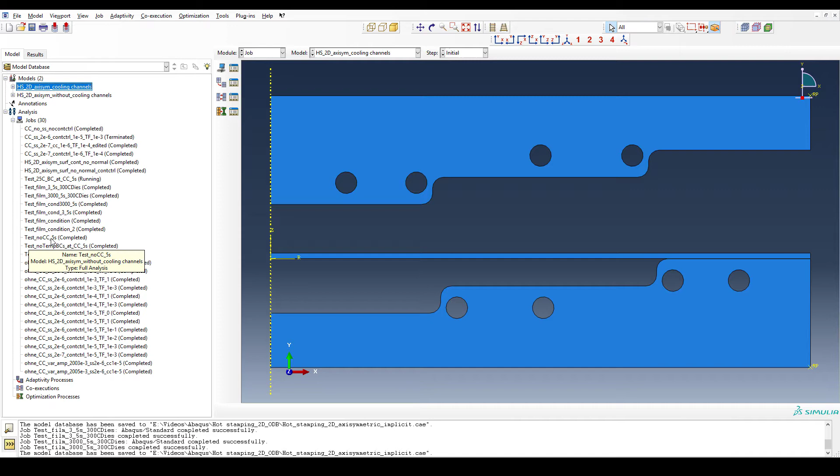So if we look at the results, we will first take a look at the reference simulation without any cooling channels being introduced. We'll check the nodal temperature. I've done some work and changed the path a little bit.

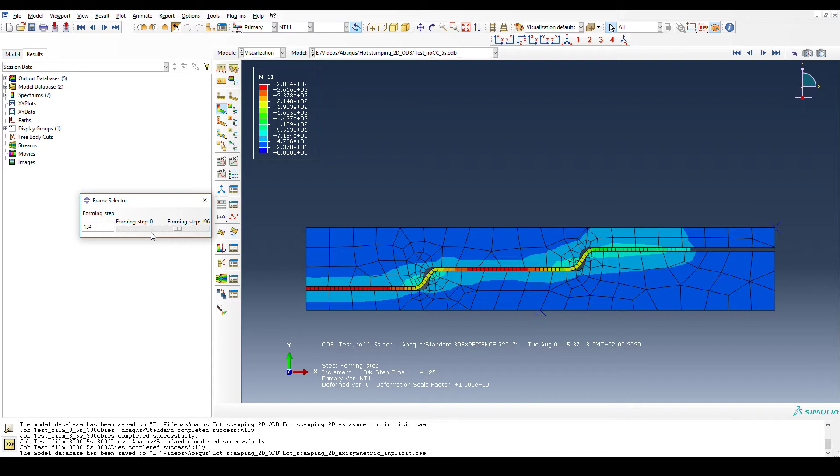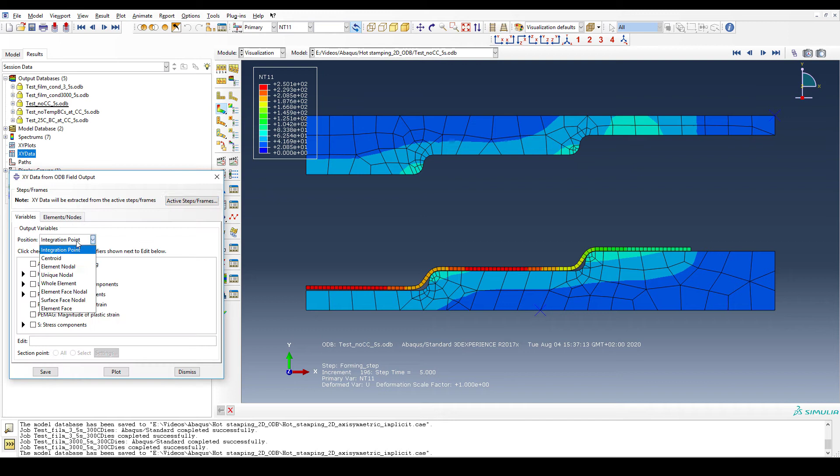So for instance, if we just take the temperature -- okay, so that is the reference temperature distribution. You see the contact phase, so you have the forming phase and then the contact phase, and then again, it's basically what we talked about in the first video, just a little bit extended.

It took Manish and me a couple of hours to understand all the details of it, so we only show you the results, but that's the beauty of finite element simulation. You are presented with a result that you don't understand, and then step by step you check the physics behind it, and then you come up with a conclusion, and that's pretty interesting.

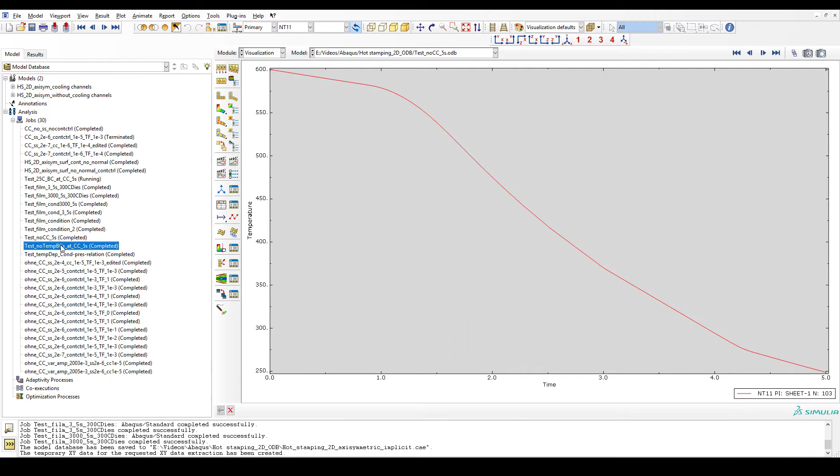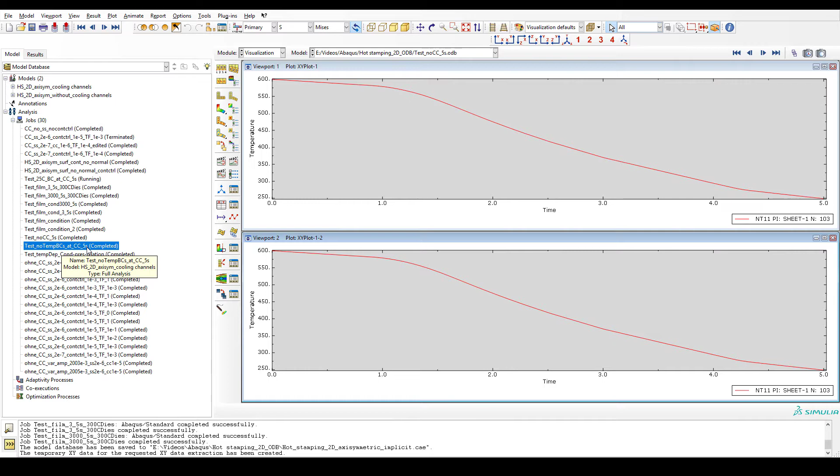I will start with the outcome of our analysis, which is checking what happens if you only introduce the cooling channel and don't do anything else -- you simply drill the holes in there and keep the rest constant. So this is what I want to do with you right now.

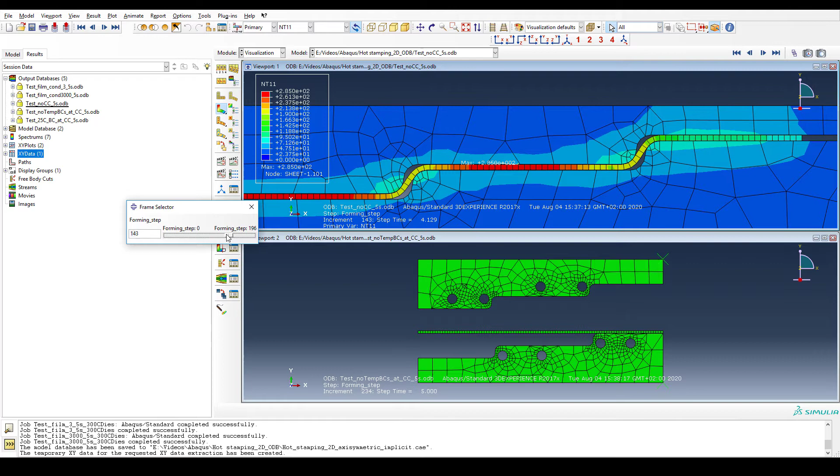First we are interested in the maximum temperature again, and we go to a similar state, which is at the end of the contacting phase, let's say at 4.1 seconds. We do the same with the cooling channels introduced, so that's roughly the same time span. And then we want to see again the location here.

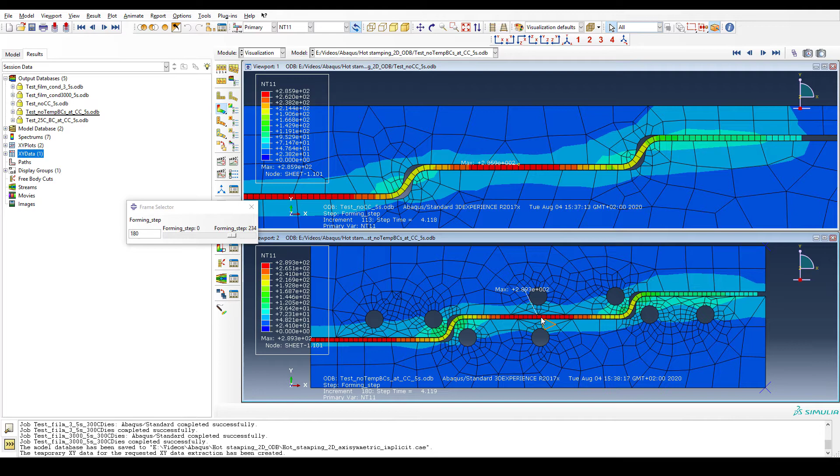What we see is that the temperature with the cooling channels present is higher, at least at the maximum location, and you can also see some differences. Let's give a uniform scale for both simulations, so then it becomes easier to compare the two.

So you can clearly see that the sheet temperature in this case is lower, while the maximum is higher. So there are already some interesting observations just by introducing the cooling channels. You can also see the distribution of the cooling channels affects the temperature between the two, just by the cooling channels being there.

That's, I would say, a first interesting result to observe. And next, you would ask, okay, how do I - and this again is for me probably the most important topic when it comes to being a simulation engineer - you need to think about how to properly define my boundary condition. We said, okay, we run a fluid through here, then you say, okay, I can simply define, let's say, 25 degrees Celsius boundary condition.

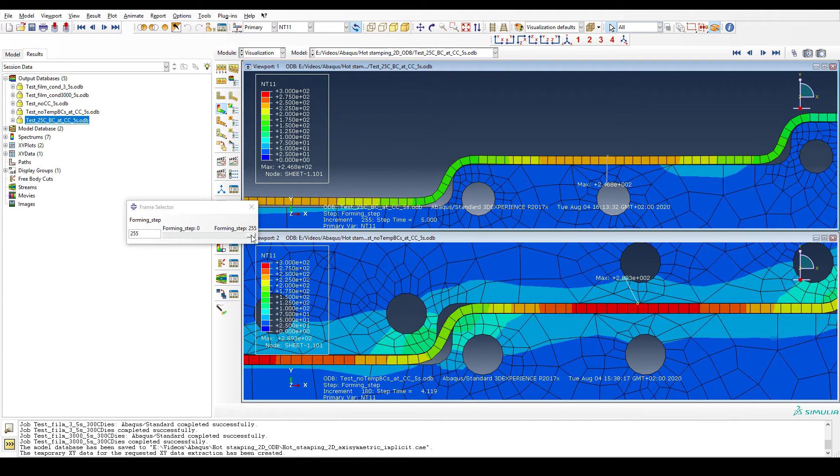at my cooling channels. So this is what we did here. We'll switch to the same time frame roughly. And you can see again that what is quite interesting is that the maximum temperature is altered, it's lower, and also the overall temperature of the sheet is lower, which you would expect since there is cooling defined at the edges.

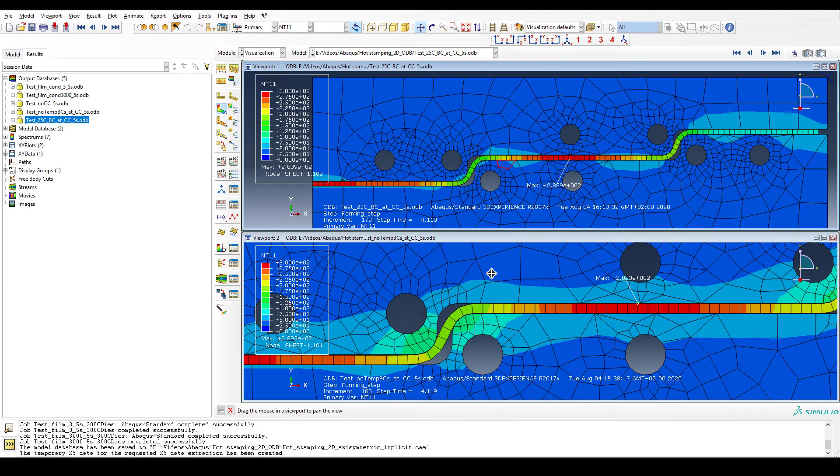However, what is most striking - and here it's technically also correct - is that you see the temperature distribution in the die is very different. Here the heat was more evenly distributed. However, think again: the dies do not dissipate heat to the ambient. So where does the heat go?

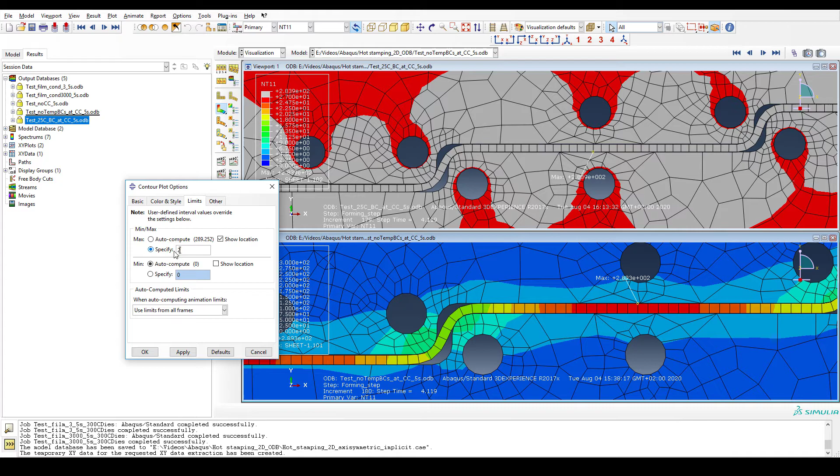Let's give 27 as the maximum temperature for both simulations. Remember, we specified 25 degrees Celsius at the edges. So you can clearly see that defining 25 degrees C, it is maintained because it is a boundary condition that must be fulfilled while solving the thermal equilibrium, or the thermomechanical equilibrium, I should better say. In this case, they heat up to whatever value. However, keep in mind that since no heat is technically lost in the dies - because they don't radiate to the ambient - it is just redistributed.

So think of it: is this the correct way to model the boundary conditions if the heat is not being taken away from the system but only redistributed? Your answer should be no, it isn't.

Because defining a fixed temperature only means that it's like a rigid body - you tell the equations there they have to be 25. Whatever you do in the rest is according to your other boundary conditions. This means the inflow of heat due to conductance with the sheet, and no outflow because there's no radiation to ambient. Again, I'm saying that you alter the distribution, but if you want to take something away from the system, you don't use this - this is without it.

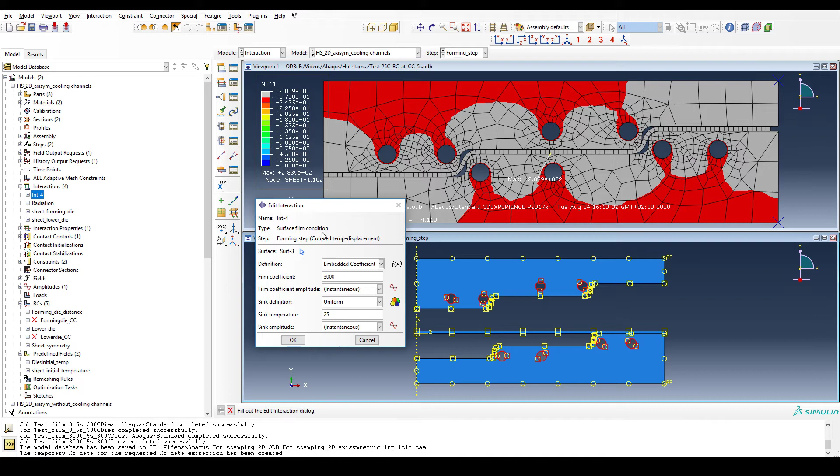Because here you can see I've selected the 8 cooling channels, technically the inner surface of those cooling channels, and I defined a sink temperature. At the surface, you can imagine having an inside and an outside. The inside of the surface is the sink temperature, which is 25 degrees C, but this 25 degrees C is not part of your body. The outside surface is part of your body, but the flow from the outside - which is part of your body - to the inside - which is not part of your body - is defined by the film coefficients, like a conductivity coefficient you can think about.

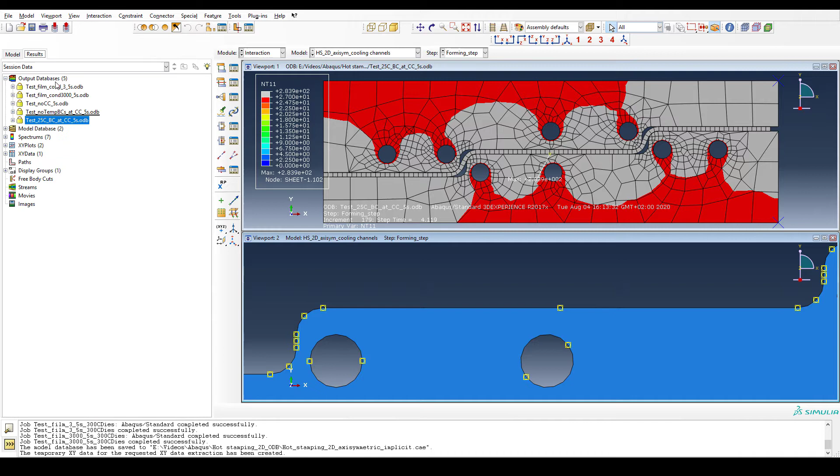And so we ran 2 simulations, one with a realistic value of 3 according to our unit system, and one with an unrealistic value of 3000. I now want to show you the results step by step. So we start with the one that has the realistic film coefficient, which is also lower than - wait a second, I need to go to the same time step.

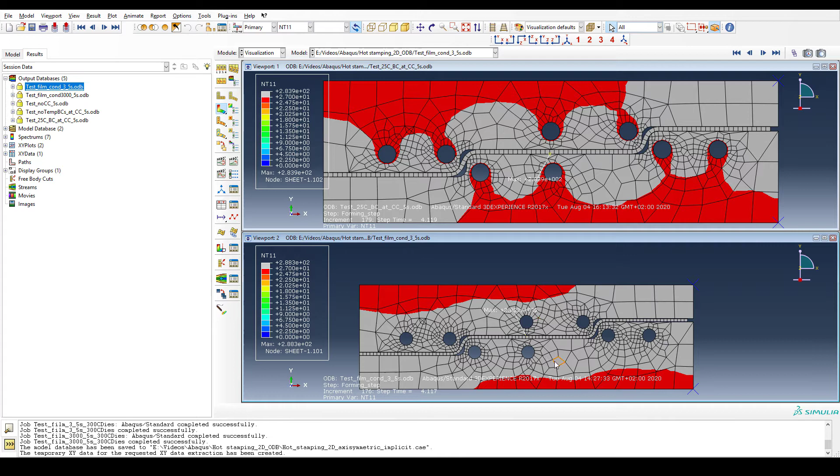Roughly here. And you can see, let's go to that - the temperature distribution looks again more similar to the case where we defined no boundary conditions, rather than the one where we defined the fixed 25 degrees as you see on top. So why is this the case? Why didn't introducing the film condition really affect our results?

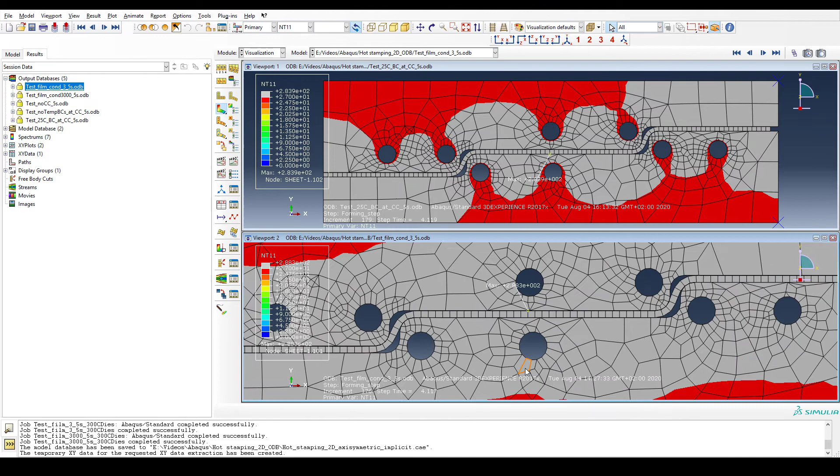For this, we again fall back to our heat flux analysis, which is pretty interesting because it can tell us a lot about what's going on. Here, if we look at, let's say, the cooling channel in the middle, we can observe a phenomenon where a lot of the heat is flowing around. Here at the top, it's partially flowing around and partially flowing into the sink, but a lot of the time, and you can also see this here on the left, the heat is flowing around my cooling channel.

So why is this the case? If we go back and check our model definitions and our film coefficients, our conductivity coefficient was defined to be 3. And our internal conductivity, just from the material, the 22MnB5, we defined as 40.

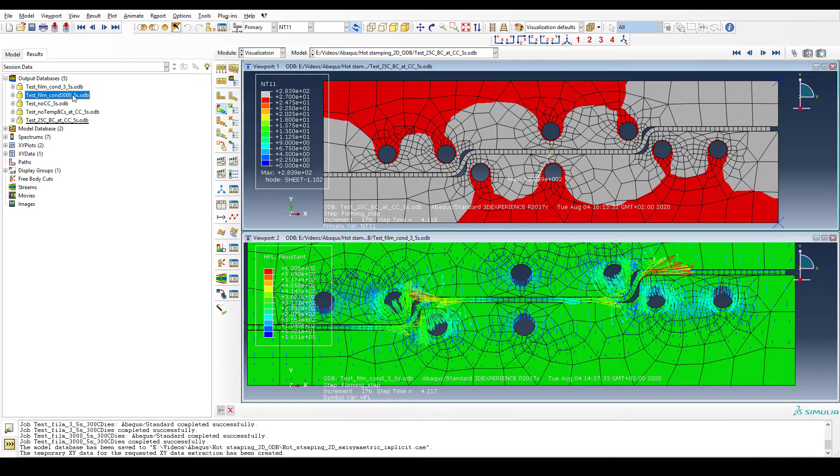Okay, let's compare it with the one where we defined 3000, which is artificially too high, but gets us closer to our actual solution. Let's start with the nodal temperature again, and we see that in this case the result is a mix between our falsely defined 25 degree boundary condition and having no or a low boundary condition.

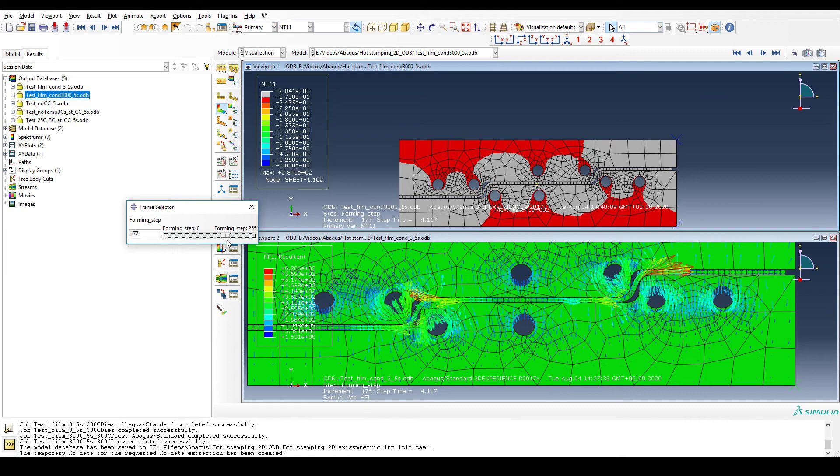Let's go to the right point in time, about here, and take a look at the flux as well. We see now that the flow of heat is actually at the surface. In the best case, it's perpendicular, meaning the majority of the heat flows towards the sink, right?

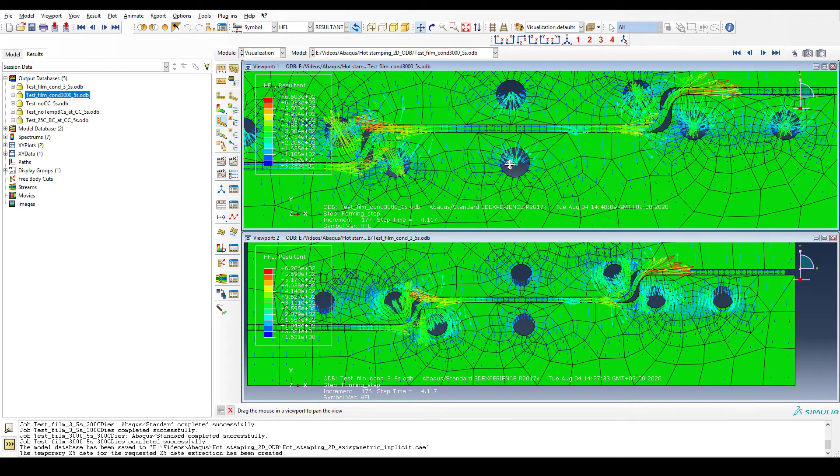With this artificially high film coefficient, it is more likely for the heat to flow into the sink, and the sink is actually taking away energy from the system, unlike the 25 degree boundary condition. Even though they look similar, it's technically something very different.

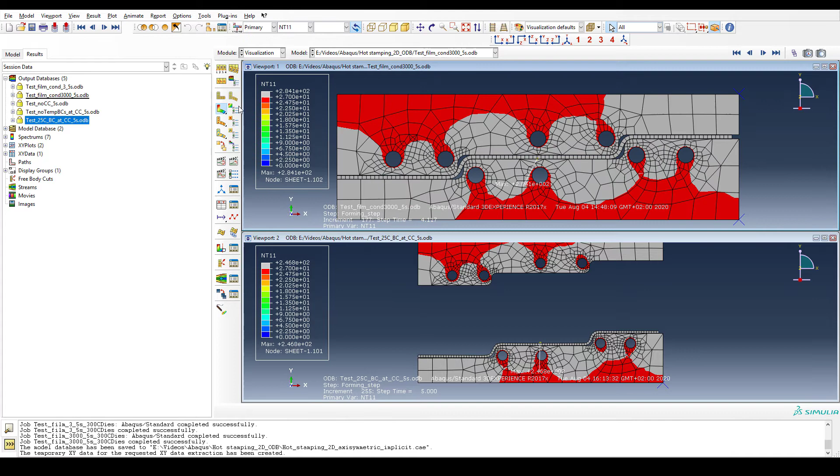So again, I want to compare the falsely defined boundary conditions with the one where we did it artificially wrong. Both cases I would consider incorrect, but they yield similar results. That's interesting.

However, in the lower case, where we defined the boundary conditions without considering the outflow of energy to the cooling channels, we forced the overall energy within the dies to follow a certain path—not the one that gets close to the cooling channels, but rather around it.

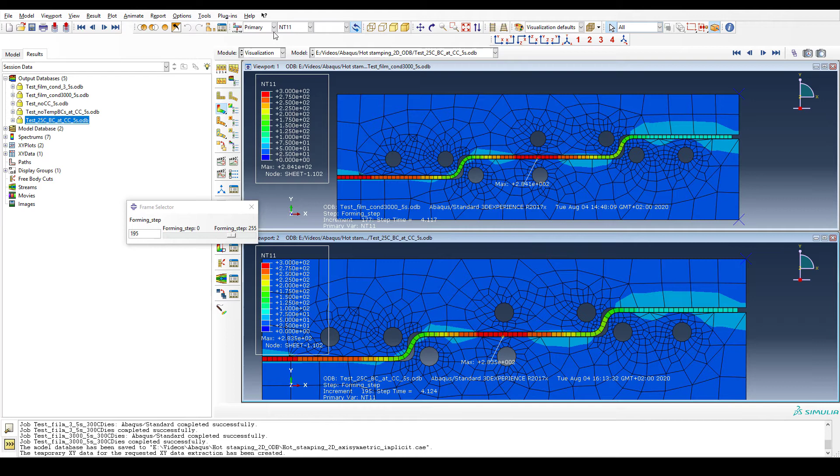The same holds true if you activate the cooling channels and make them an actual sink, so the energy flows into it. But opposed to this, it will actually be taken away from the system. So if you look at this, it's similar, but no energy is leaving the system. It's technically a little different between the two.

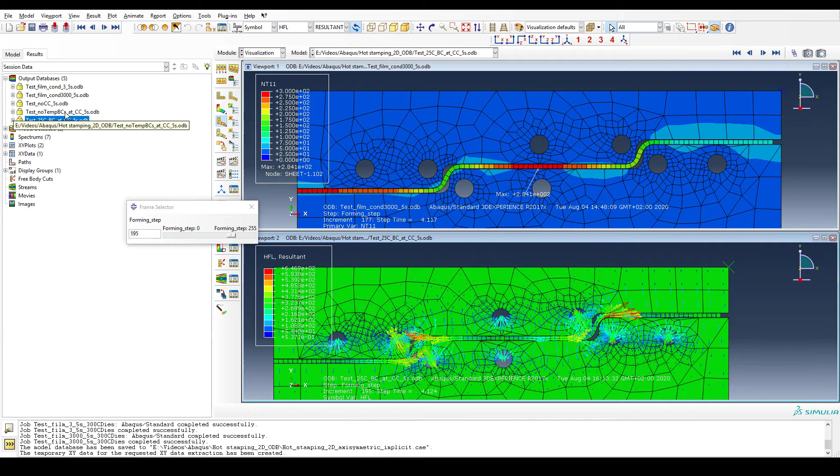But I want to get back to the start, comparing no cooling channels to cooling channels with realistic boundary conditions. So far we've analyzed what type of boundary conditions lead to what result. Even though we'd expect our sheet to be cooled faster, or the average temperature at the end to be lower, we now come back to what the expert said in the beginning: why do you do this?

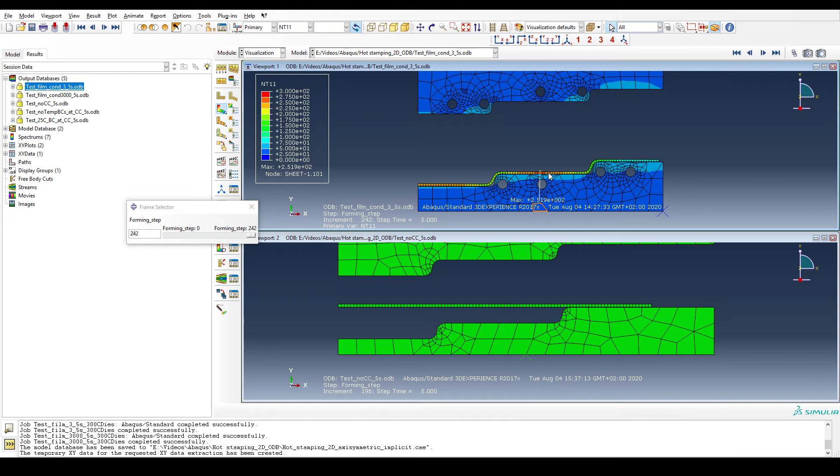It doesn't really do much. If we take a close look at the results, they might actually be right, because given only small differences—we can zoom to maybe 250 here and 250 here—we see that the highest temperature with cooling channels and realistic boundary conditions is even slightly higher than in the case without cooling channels.

We've proven this might be correct by introducing cooling channels with no boundary condition. In the case of no cooling channels, there's material close by which can take in heat. In the case of a cooling channel, there's no material which can take in that heat.

So we can conclude that the experts are right, at least given our task, which was to run this once. But I just started two simulations, which I'm now looking at for the first time, because I thought: what if you do this repetitively, say 100 times?

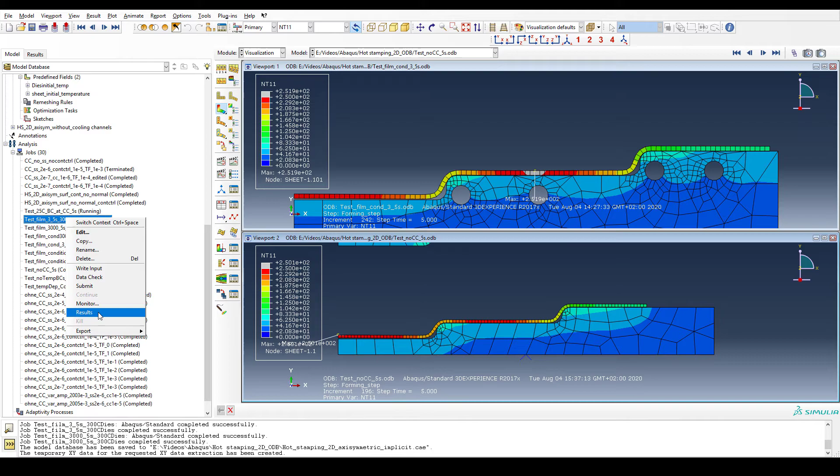Over time your dies will heat up, because we still assume there's no way to radiate away the energy. If you repeat dozens or hundreds of these forming operations, which might actually happen in a manufacturing company, I defined an initial boundary condition of 300 degrees C for the dies, and I want to look at the results for two different film conditions, since we've seen this might actually be the case. Maybe I should run another simulation without the cooling channels.

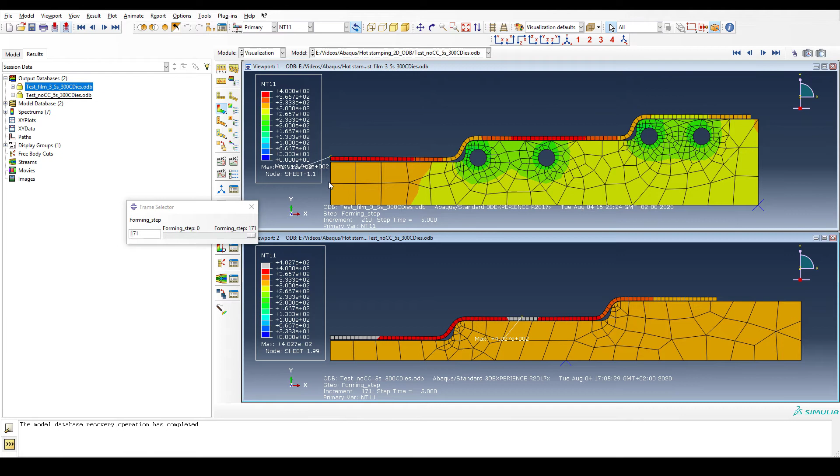A couple of other things to observe. Now, for the first time, let's check the location of the maxima for both cases. On top, the maximum is actually at the center, which is farthest away from any cooling channel. In all the other sections, one is closer. So it makes sense that at the center of the axisymmetric problem there is the highest temperature. Whereas in the case on the bottom, without cooling channels, we still have it in this middle section, as we've seen before.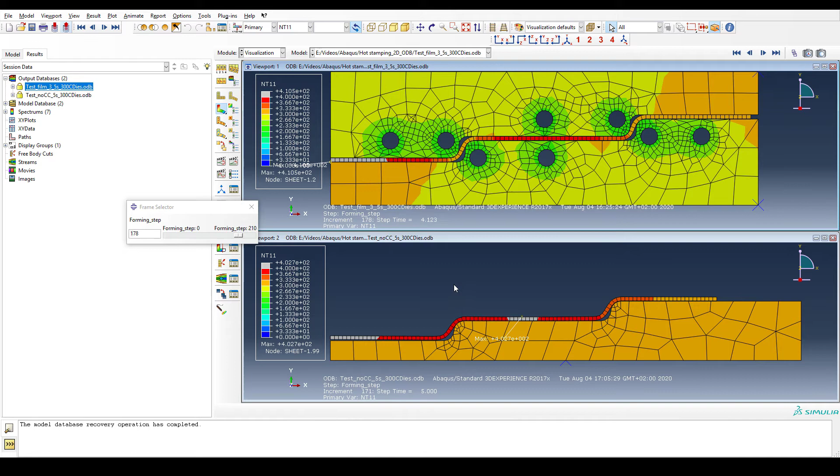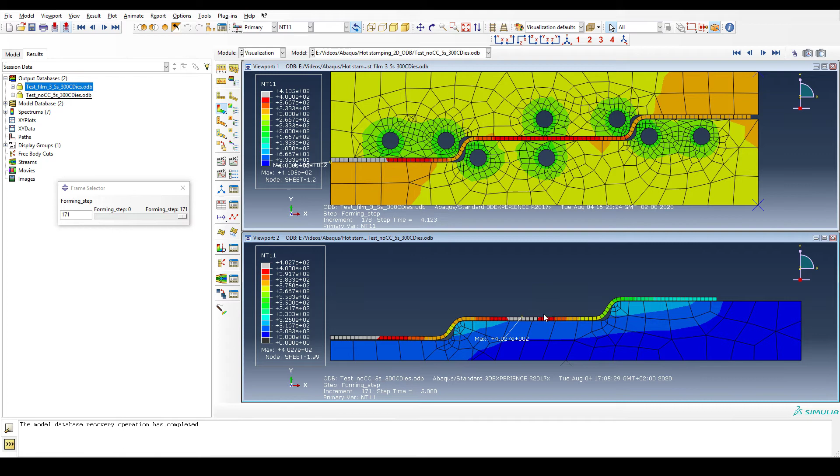A couple of other things to consider: let's keep the limits in the lower case, the minimum at 300. What you see is the same as in the other case, that your die further heats up because it still takes in energy, heat, from the sheet. It started out at 300 and now it's above 300. If we do the same here, we see most of the body is below 300 except those areas, like in the left corner and upper right corner, where you don't have any cooling channels close by.

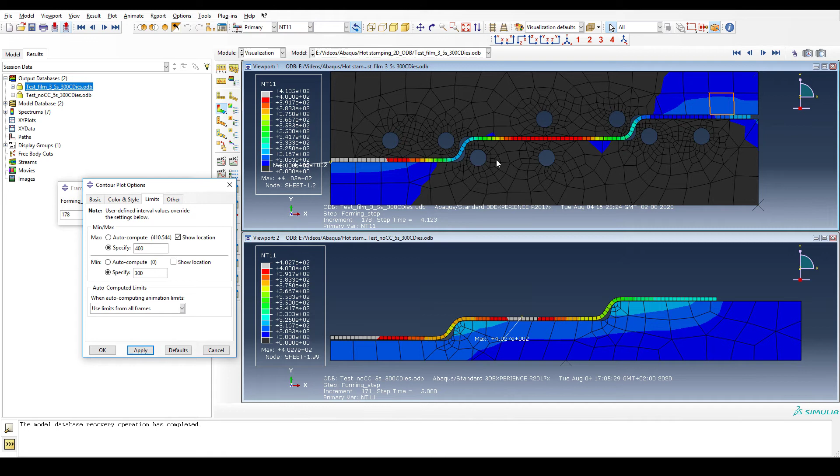Since the heat transfer is fairly uniform, if you look at the bottom, within the contacting area it's fairly uniform. So in the areas where you don't have cooling channels to suck away the heat, it makes sense that your body heats up; in the other areas, it cools down. Let's specify the maximum here and the minimum here. So it's kind of like the inverse: here it's been above 300, and in the other case it's below.

According to the cooling channels, here it's now 200 degrees C, which is fairly realistic. In this case, a realistic film coefficient, like one based on water in steel pipes, can be the convective one, but it's still fairly low compared to the internal conductivity. It still has an impact, and this is what I wanted to show you.

This is what I really like about FEM simulations. By altering all these things, you can understand a lot of factors. Talking to experts, they say, well, don't bother about cooling channels, you don't need it. They are right, but given certain circumstances, it still might be interesting to introduce them even in sheet metal forming. If we do bulk metal forming, it will be a different story, and this will be a story for a next video as well.

But we have learned so many things today analyzing these simulations: that the placement of the cooling channel is very important, that just the sheer existence of the cooling channel has an effect, that the definition of your boundary conditions is very important, especially if you operate with closed systems, meaning the dies are not radiating heat away.